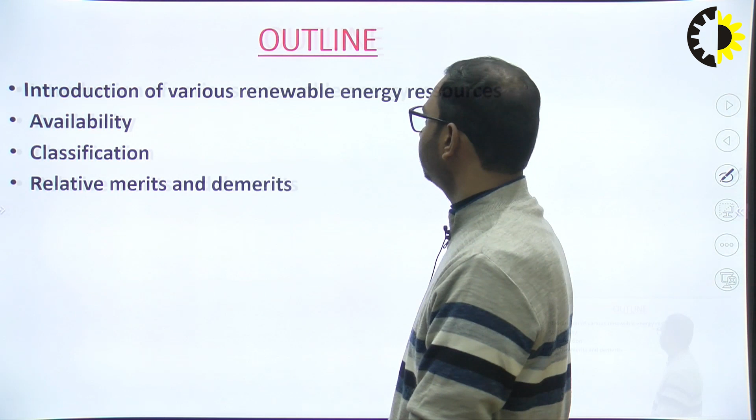So first of all, these are my outlines. In this lecture, I will discuss what is the introduction of various renewable energy resources, their availability, their classifications, and the relative merits and demerits of various renewable energy resources.

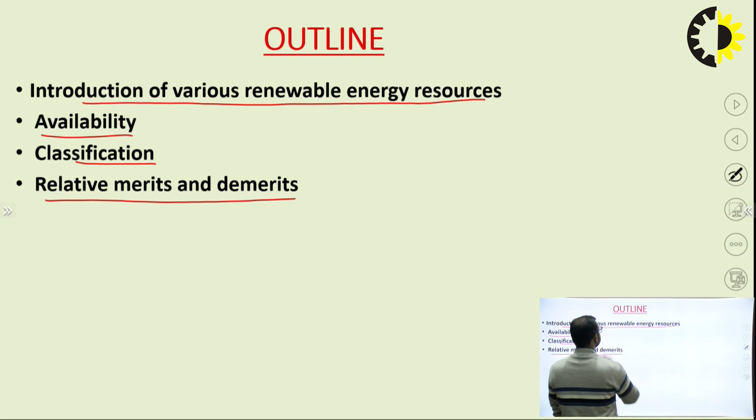Energy resources are categorized into two types: conventional energy resources, also known as non-renewable energy resources, and non-conventional energy resources, also known as renewable energy resources. So what is conventional and what is non-conventional energy resources?

First, conventional energy resources. These resources are accumulated in nature over a long span of time and cannot be quickly replenished when exhausted. Examples of conventional energy resources are coal, petroleum, natural gas, and nuclear fuels like uranium and thorium. These are all examples of non-renewable energy resources.

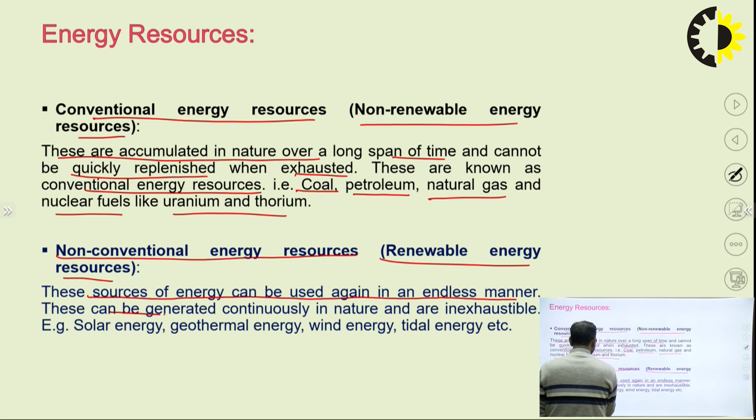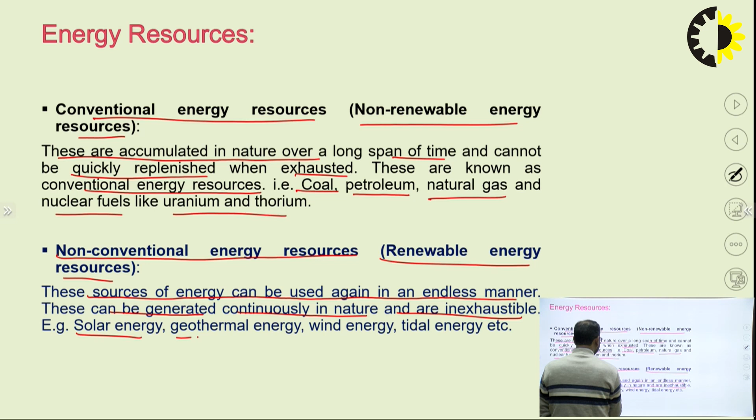Renewable energy resources can be used again and again, and can be generated continuously in nature, but are inexhaustible. Examples of non-conventional energy resources are solar energy, geothermal energy, wind energy, and tidal energy.

Examples of renewable energy resources include solar energy, biomass energy, wind energy, geothermal energy, and hydropower energy. Whereas fossil fuel, coal, natural gas, and nuclear fuel are examples of non-renewable energy resources.

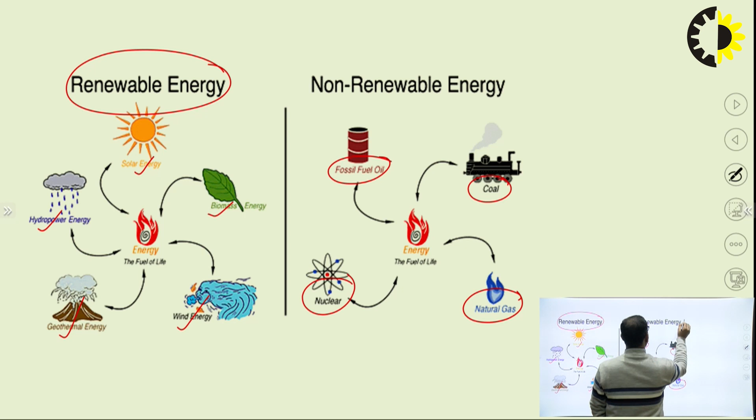Now, in the subsequent slide, I will discuss different types of renewable energy resources in detail.

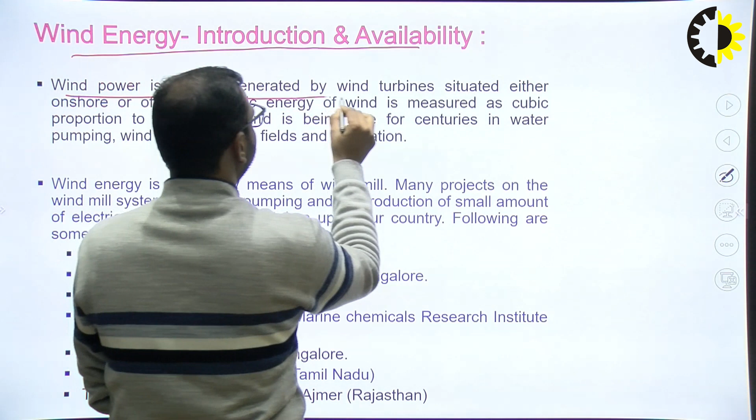The first one is wind energy. What is wind energy, its introduction and availability? Wind power is usually generated by wind turbines situated either onshore or offshore. The kinetic energy of wind is measured as cubic proportion to its velocity, and it has been used for centuries in water pumping, windmills, irrigating fields, and navigation.

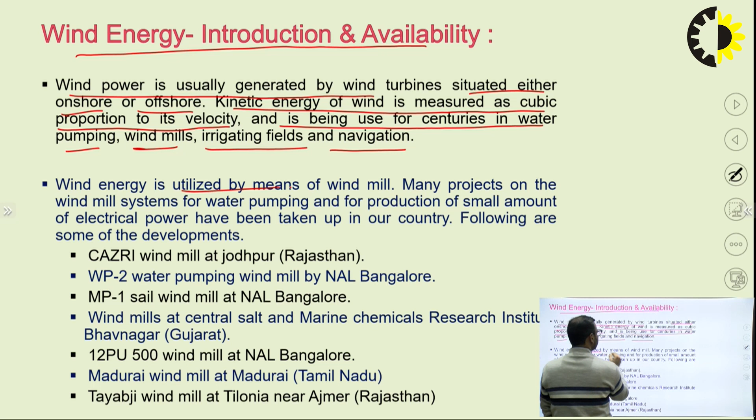Wind energy is utilized by means of windmills. Many projects on windmill systems for water pumping and production of small amounts of electrical power have been taken up in our country.

Following are some developments regarding wind power plants: CAZRI windmill at Jodhpur, WP2 water pumping windmill by NAL Bangalore, MP1 sail windmill at NAL Bangalore, windmills at Central Salt and Marine Chemical Research Institute, Bhavnagar, Gujarat, and the 12 PU 500 windmill at NAL Bangalore.

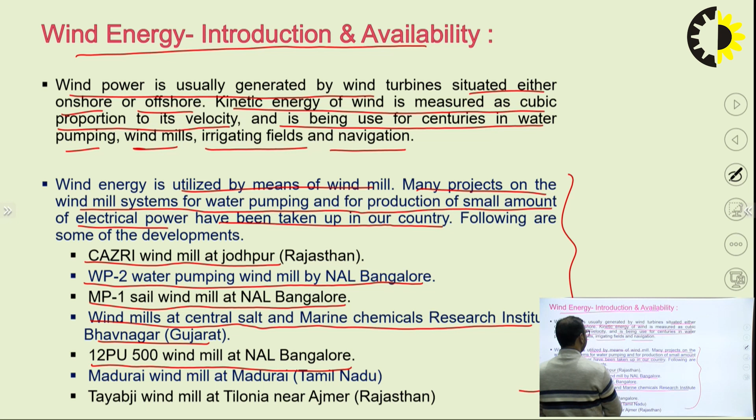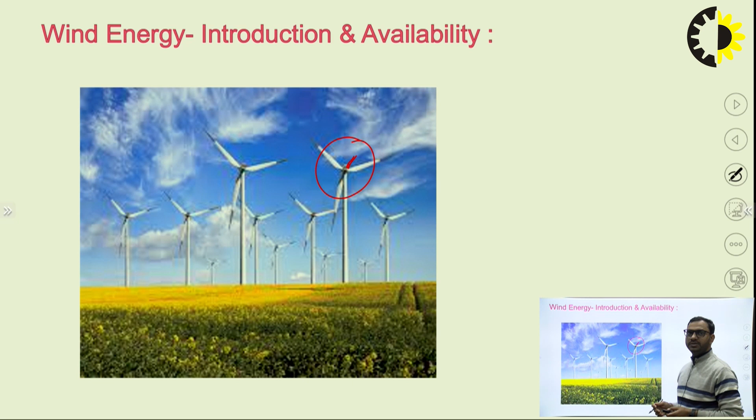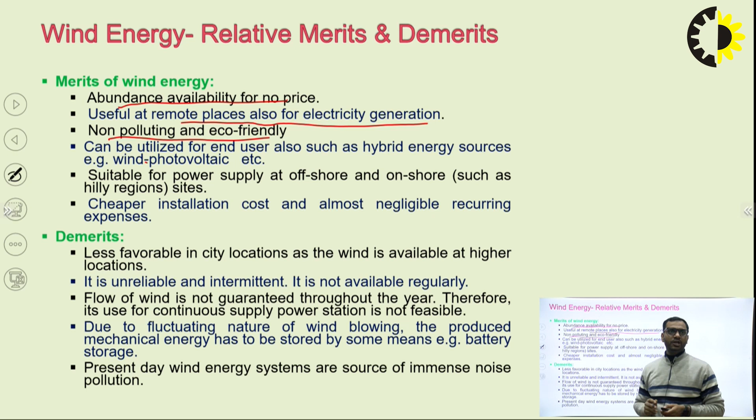Now, what are the merits and demerits of wind energy? First, abundant availability for no price. Second, useful at remote places for electricity generation. Third, it is non-polluting and eco-friendly. It can also be utilized for end users, such as hybrid energy sources, for example wind photovoltaic. It is suitable for power supply at offshore and onshore sites. It has cheaper installation cost and almost negligible recurring expenses. These are some merits of wind energy.

Now for its demerits: first, it is less favorable in city locations, as wind is available at higher locations. It is unreliable and intermittent, not available regularly. The flow of wind is not guaranteed through the year, so it is not feasible for continuous power supply stations.

Due to the fluctuating nature of wind blowing, the produced mechanical energy has to be stored by some means, for example in the form of a battery. The last demerit is that present-day wind energy systems are a source of immense noise pollution, meaning they produce lots of noise. So these are some merits and demerits of wind energy.

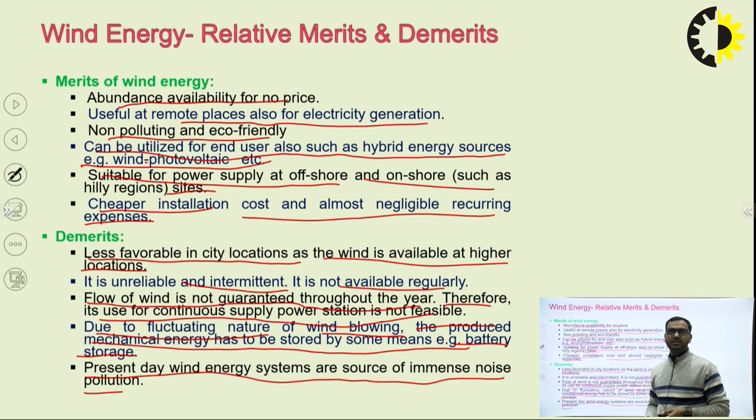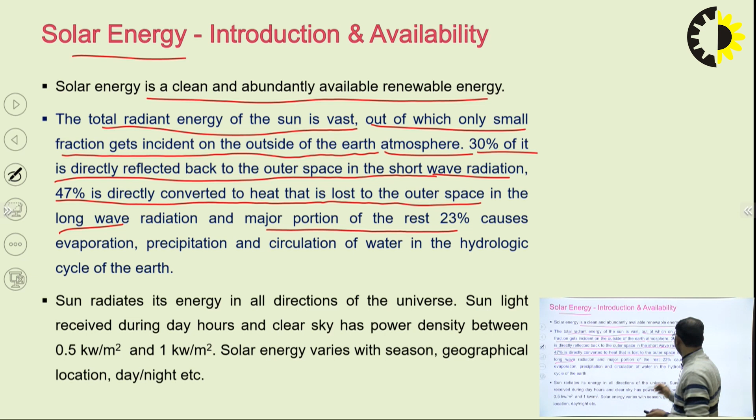So we can say that 47% is directly converted to heat that is lost to outer space in long wave radiation, and a major portion of the rest, 23%, causes evaporation, precipitation and circulation of water in the hydrologic cycle of the earth.

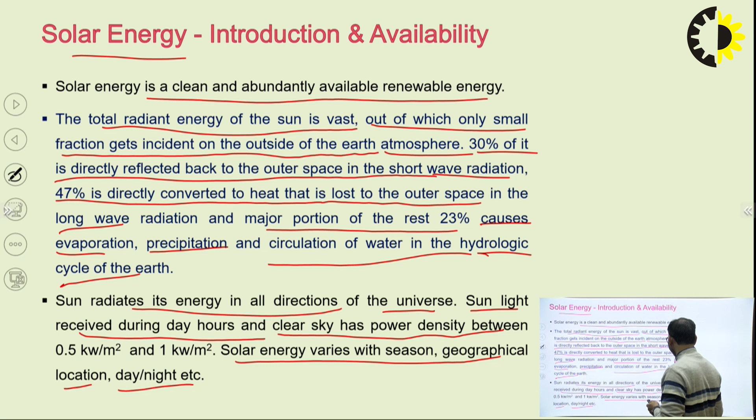Sun radiates its energy in all directions of the universe. Sunlight received during day hours with clear sky has a power density between 0.5 kilowatt per meter square and 1 kilowatt per meter square. So solar energy varies with season, geographical location, day and night, etc. Solar energy is dependent on these conditions.

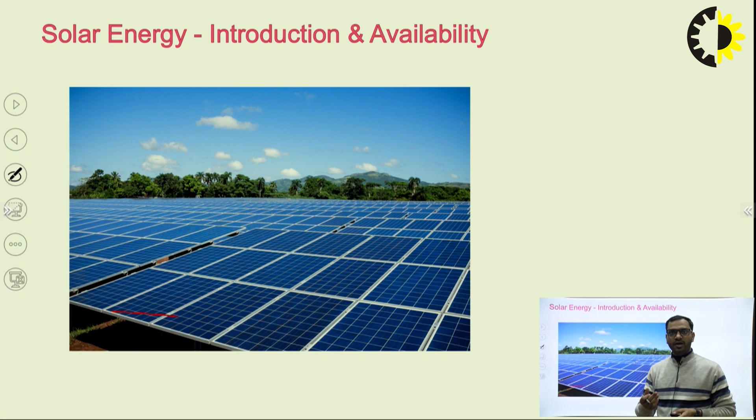Now these are some photovoltaic solar cells which work on the photovoltaic effect and produce electricity by using solar rays. So what are its merits and demerits?

Talking about its merits, first is noiseless operation. It occupies less space on the floor as there is no need of storage vessels. It has cheaper initial cost and no need of containers to store fuels. Another merit is most equipment does not require serious attention during working, for example food will be cooked simply by putting a solar cooker in sunlight.

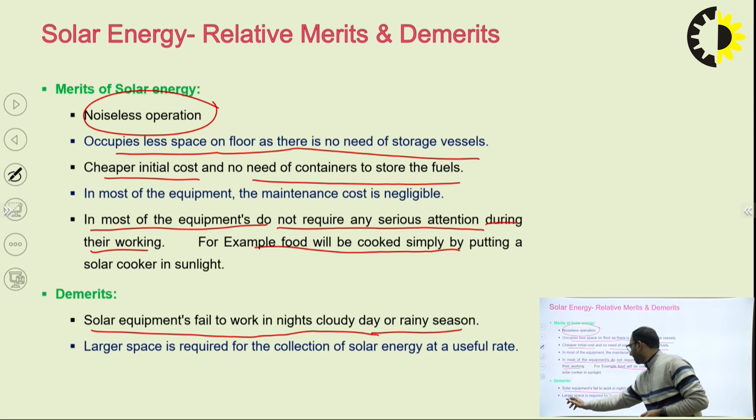These are some merits. Now talking about its demerits, solar equipment fails to work at night, on cloudy days, and in the rainy season, and larger space is required for collection of solar energy at a useful rate. So for large production of electricity through solar energy, the required space is larger.

Now talking about tidal energy, what is tidal energy? With the help of tidal energy we can produce tidal power, which exploits the movement of water caused by tidal currents, the rise and fall in sea levels due to the tides. Although not widely used, it has potential for future electricity generation and is more predictable than wind energy and solar power. The technology required to harness tidal energy is well established.

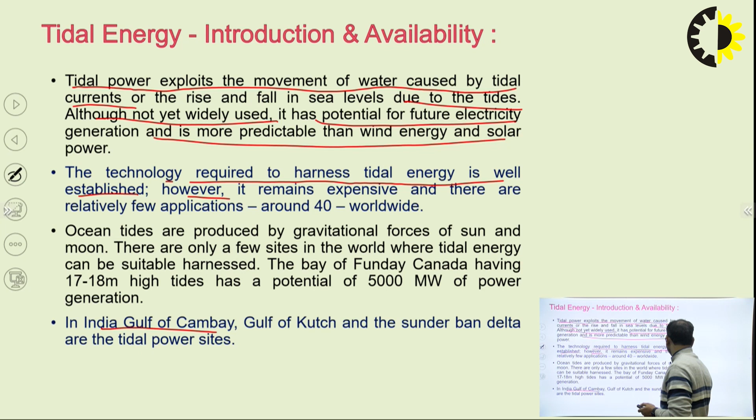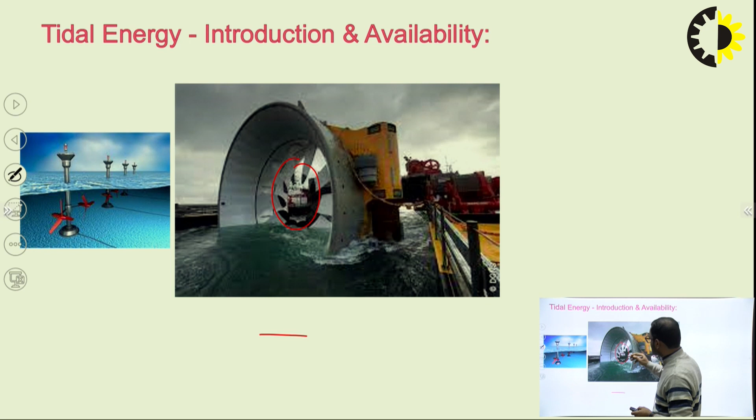However, it remains expensive and there are relatively few applications, around 40 worldwide. The Gulf of Cambay, Gulf of Kutch and the Sundarban Delta are the tidal power sites in India. These are the pictorial representations of a tidal power plant. Here, with the help of tidal energy, we rotate the turbine, which is coupled with an electric generator, which produces electricity. Now, what are the merits and demerits of tidal energy?

Talking about its merits, very less area is required because they are built on bays. It is free from pollution and does not use any fuel. It is much superior to a hydropower plant as that is totally dependent on rain, which always fluctuates year to year. Another merit is it does not produce any unhealthy waste like gases, ash, and refuse, etc.

Talking about its demerits, the first demerit is tidal power plants can be developed only if natural sites are available. As the sites are available on the bay, which will always be far away from the load centers, the power generated involves more transmission cost. The capital cost of the plant is also high. And the last one is navigation is obstructed. These are some merits and demerits of tidal energy.

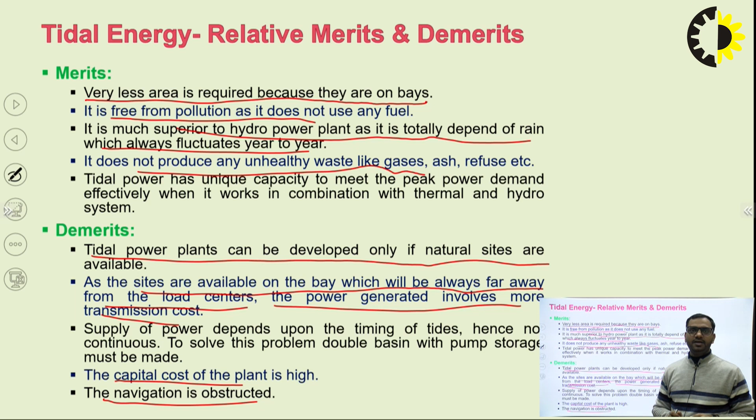Now I am talking about MHD energy. What is MHD? MHD means magneto hydrodynamic. The MHD generation, also known as magneto hydrodynamic power generation, is a direct energy conversion system which converts heat energy directly into electrical energy without any intermediate mechanical energy, as opposed to the case in all other power generating plants. So this is the pictorial representation of an MHD power plant.

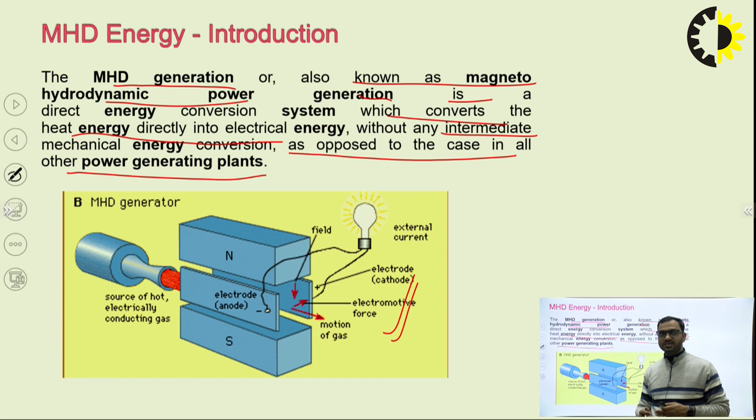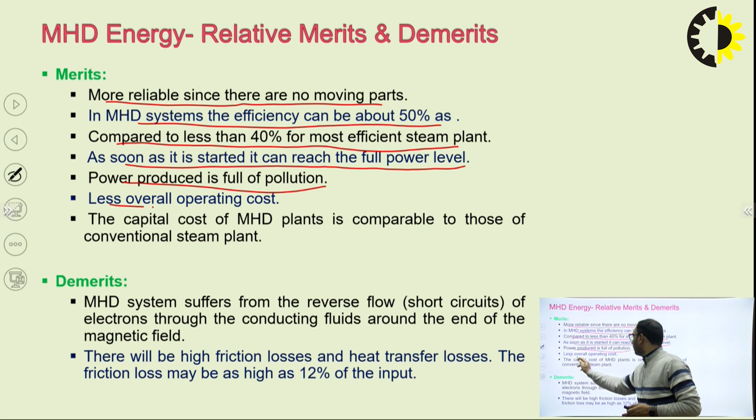Now we are talking about its demerits. The MHD system suffers from the reverse flow of electrons through the conducting fluids around the ends of the magnetic field.

So this is the disadvantage of MHD energy. There will be high friction losses and heat transfer losses. The friction loss may be as high as 12% of the input. So this type of plant has 50% efficiency.

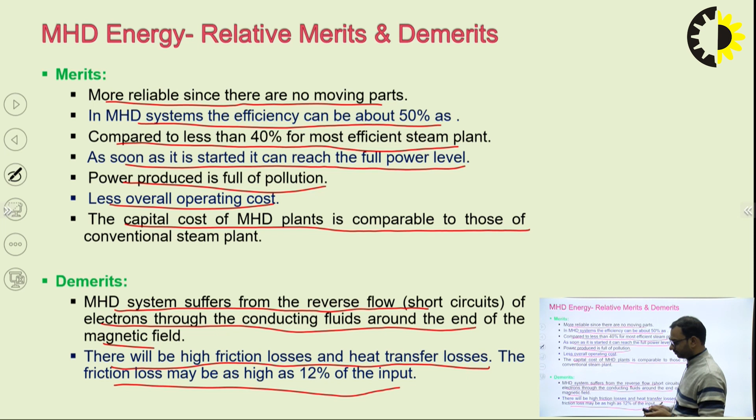Now what is fuel cell? Another renewable energy resource is fuel cell. So what is fuel cell? Basically, fuel cell is an electrochemical cell that converts the chemical energy of fuel into electricity.

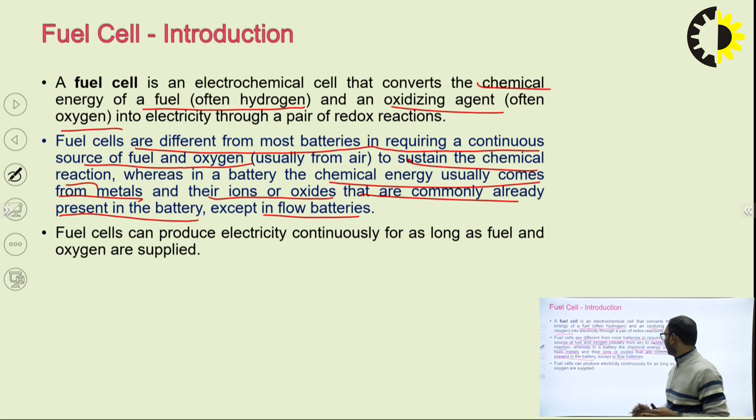And what is chemical energy? This chemical energy is hydrogen. And what is the oxidizing agent? The oxidizing agent is oxygen. Fuel cells are different from most batteries in requiring a continuous source of fuel and oxygen to sustain the chemical reaction, whereas in a battery, the chemical energy usually comes from metals and their ions or oxides, which are commonly already present in the battery, except in flow battery. So fuel cell can produce electricity continuously for as long as fuel and oxygen are supplied.

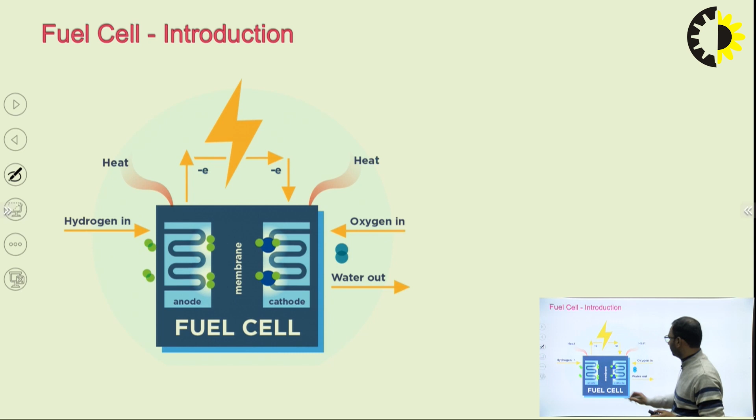So this is the schematic representation of a fuel cell. Here this is anode, this is cathode, and between anode and cathode this is electrolyte. Due to the chemical reaction occurring between anode and cathode, electricity is produced.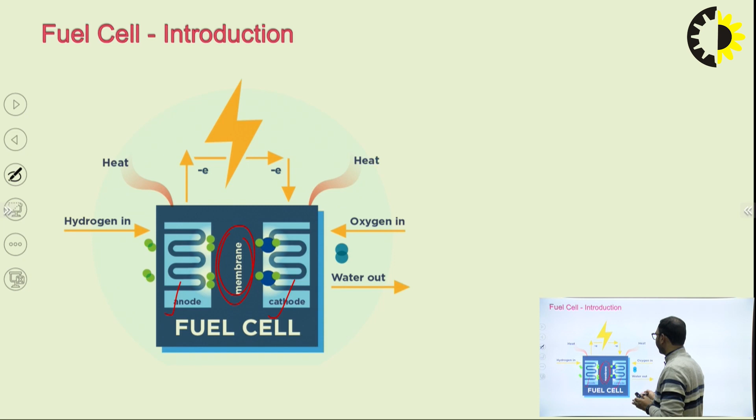So if you are talking about its merits and demerits, what is its merit? First, it has very high efficiency, as high as 70%, since it is a direct conversion process and does not involve a thermal process. Fuel cells have fewer mechanical components, hence maintenance is also less. Fuel cells take little time to start operation. Space required for a fuel cell power plant is less.

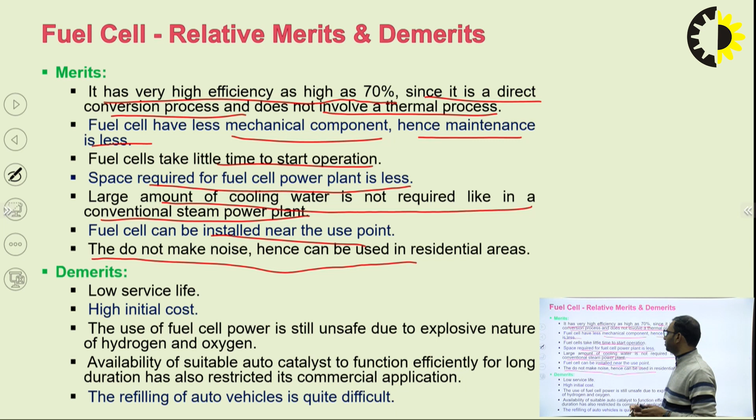Large amount of cooling water is not required like in a conventional steam power plant. Fuel cells can be installed near the use point, and they do not make noise, hence can be used in residential areas also.

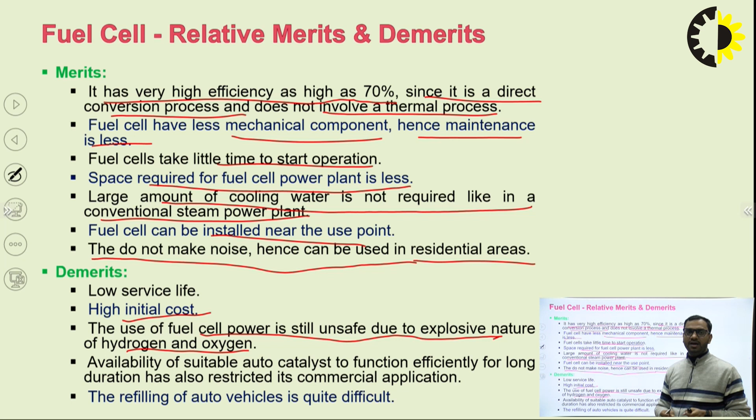Now, what are its demerits? The first demerit is its service life, which is low, and it has high initial cost. The use of fuel cell power is still unsafe due to the explosive nature of hydrogen and oxygen, so we can say that these are unsafe. Then, availability of suitable auto catalysts to function efficiently for long duration has also restricted its commercial application. And the last one is the refilling of auto vehicles is quite difficult.

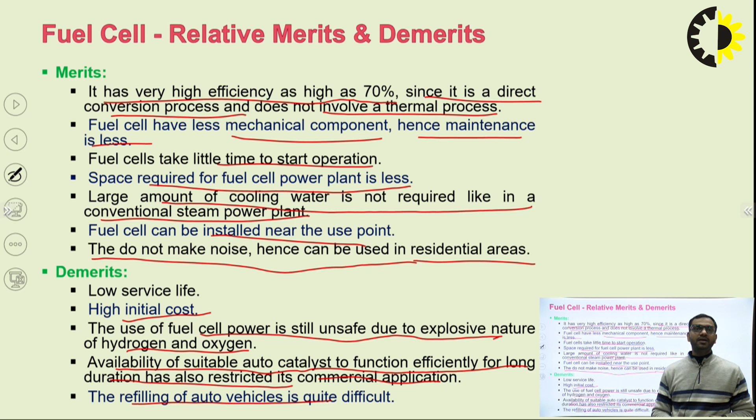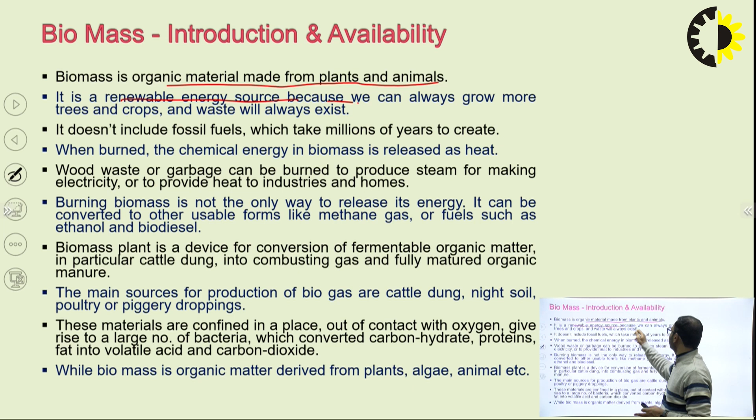Then another renewable energy resource is biomass. So what is biomass? Basically, biomass is organic material made from plants and animals. It is a renewable energy source because we can always grow more trees and crops, and waste will always exist. So it does not include fossil fuels which take millions of years to create.

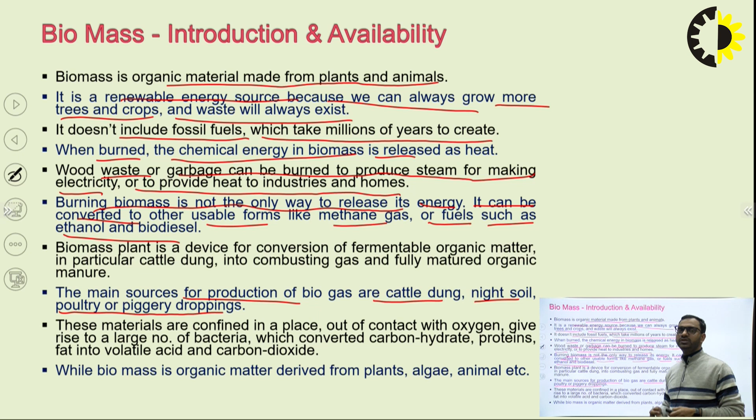When burned, the chemical energy in biomass is released as heat. Wood waste or garbage can be burned to produce steam for making electricity or to provide heat to industry and homes. Burning biomass is not the only way to release its energy. It can be converted to other useful forms like methane gas, or fuels, or ethanol and biodiesel. The main source of production of biogas are cattle dung, night soil, or poultry or piggery droppings. So by using this, we can produce heat, and by using heat, we can generate electricity.

If we are talking about its merits and demerits, it has very high cost of obtaining bioenergy through plantation, though this is lesser than the cost of obtaining energy from fossil fuels. Second merit is that plants ensure a continuous supply of energy due to their continuous growth. Combustion of biomass does not cause SO2, meaning sulfur dioxide air pollution, since the content of sulfur in vegetable matter is even less than 0.1%.

Growth of biomass consumes more carbon dioxide than is released during combustion, besides producing the atmosphere-purifying oxygen as a product of the photosynthesis process. The last merit is biomass is a low polluting type of energy. All its byproducts are capable of being recycled. So this type of biomass energy produces lesser pollution compared to others.

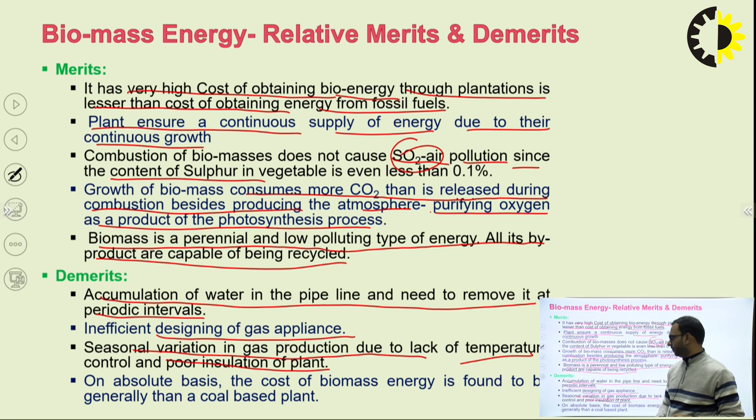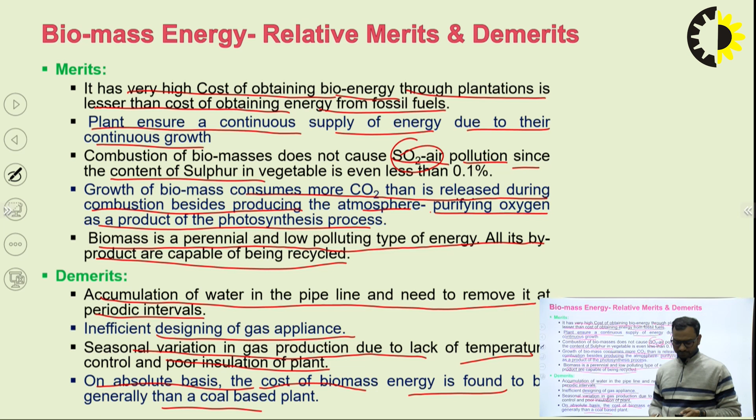Then if we are talking about its demerits: accumulation of water in the pipeline and need to remove it at periodic intervals, inefficient designing of gas appliances, seasonal variation in gas production due to lack of temperature control, and poor insulation of plant. Another demerit is that on an absolute basis, the cost of biomass energy is found to be generally higher than coal-based plant. So these are some merits and demerits of biomass energy.

Now, another renewable energy resource is OTEC energy. What is OTEC? OTEC means Ocean Thermal Energy Conversion system. Basically, ocean thermal energy conversion is a process or technology for producing energy by harnessing the temperature differences between ocean surfaces and deep ocean waters.

Due to the difference between the ocean surface temperature and deep ocean water temperature, we can produce electricity. Energy from the sun heats the surface water of the ocean. In tropical regions, surface water can be much warmer than deep water.

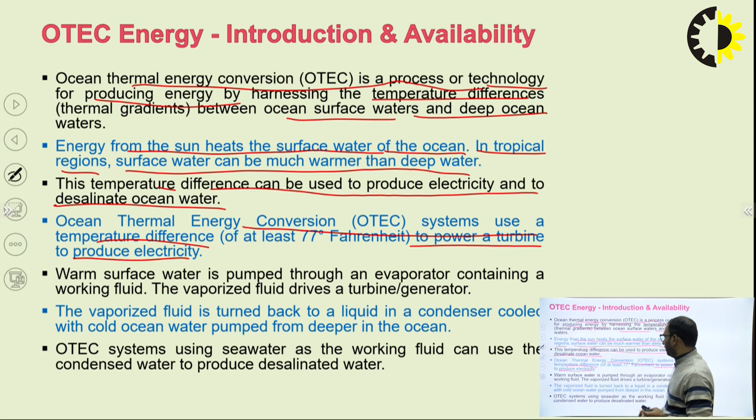This temperature difference can be used to produce electricity and to desalinate ocean water. Ocean thermal energy conversion (OTEC) system uses the temperature difference between the top and bottom surface to power a turbine and produce electricity. The vaporized fluid is then turned back to liquid in a condenser cooled with cold ocean water pumped from deeper in the ocean.

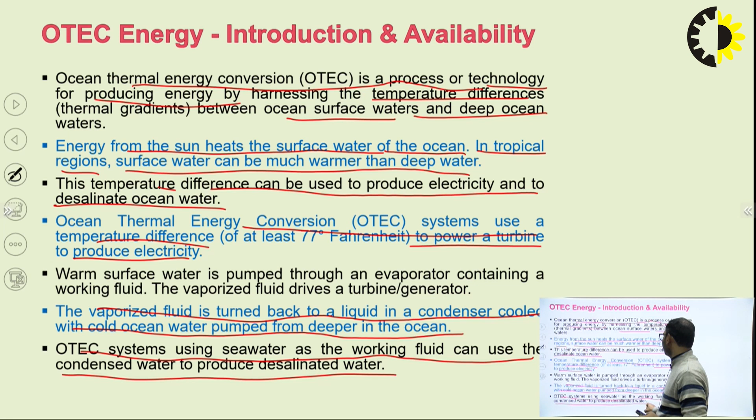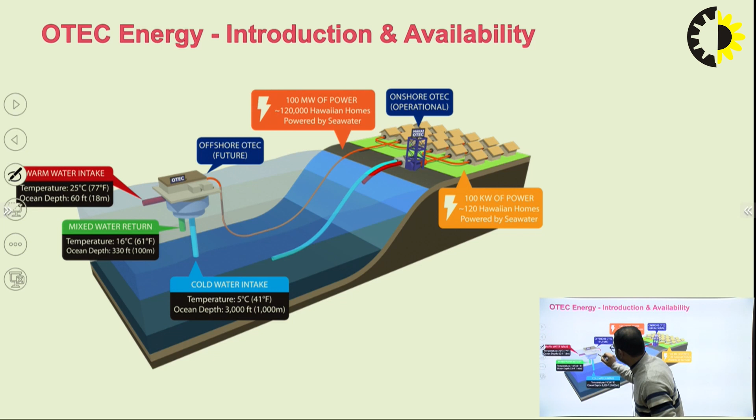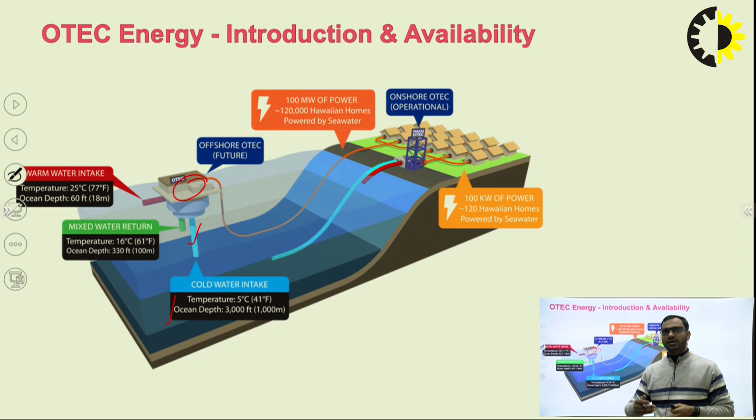An OTEC system using seawater as the working fluid can use the condensed water to produce desalinated water. This is the pictorial representation of an OTEC power plant. Here is the turbine, this is the bottom surface, this is the top surface. By using the temperature difference of the top and bottom surface, we can run the turbine, which is coupled with the electric generator to produce electricity.

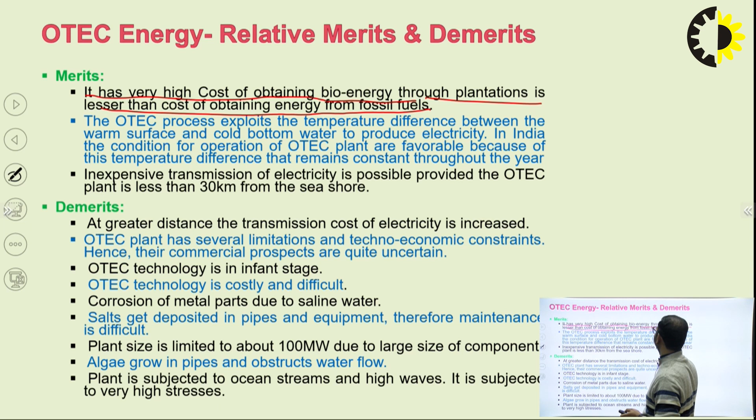Now what are the merits and demerits of the OTEC energy system? The OTEC process exploits the temperature difference between the warm surface and cold bottom water to produce electricity. In India, the conditions for operation of an OTEC plant are favorable because this temperature difference remains constant throughout the year. Inexpensive transmission of electricity is possible provided the OTEC plant is less than 30 km from the sea shore.

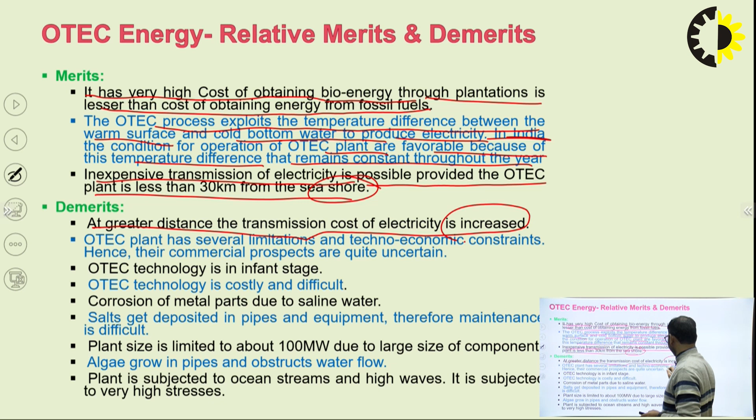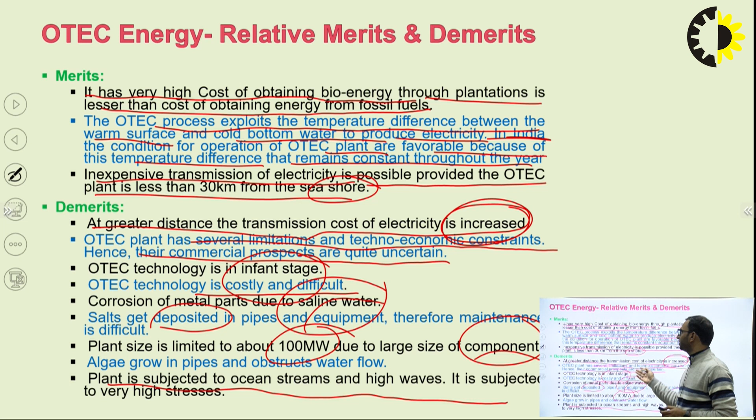Now what are its demerits? At greater distances, the transmission cost of electricity increases. It also has several limitations and techno-economic constraints, hence its commercial prospects are quite uncertain. OTEC technology is costly, difficult, and still in its infant stage. Corrosion of metal parts due to saline water is more, and salts get deposited in pipes and equipment, making maintenance difficult. Plant size is limited to about 100 megawatts due to the large size of components. Finally, the plant is subjected to ocean currents and high waves, so it experiences very high stresses. These are some merits and demerits of the OTEC energy system.

Next, another renewable energy source is geothermal energy. Geothermal energy is derived from high temperature geothermal fluids. This can be utilized for power generation and thermal applications like greenhouse cultivation, hot water irrigation in cold countries, cooking, process heat, and electrical power generation.

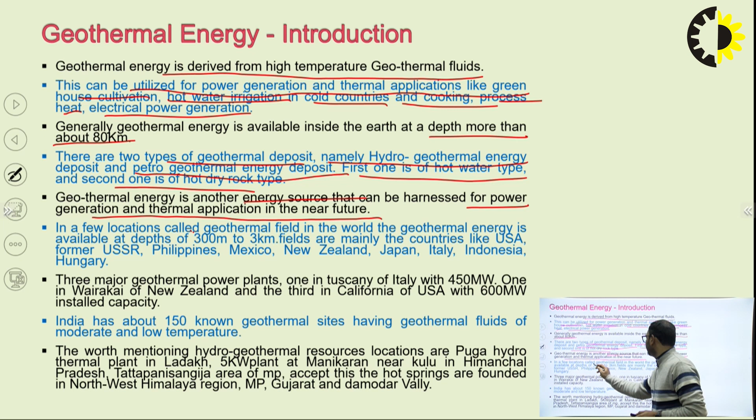In a few locations called geothermal fields in the world, geothermal energy is available at depths of 300 meters to 3 km. These fields are mainly in countries like USA, Philippines, Mexico, New Zealand, Japan, Italy, Indonesia, and Hungary. These are some locations where geothermal energy is available.

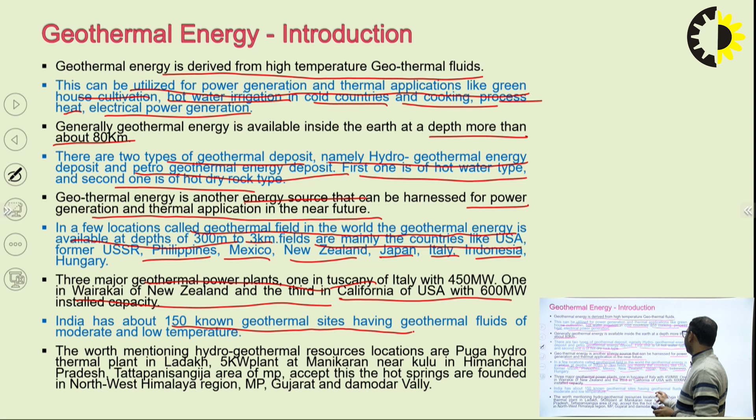There are three major geothermal power plants: one is Tuscany in Italy with 450 megawatts, one is Wairakei in New Zealand, and the third is California in USA with 600 megawatts installed capacity, available in the world. India has about 150 known geothermal sites having geothermal fluids of moderate and low temperature.

Now talking about its merits and demerits: geothermal energy offers an inexhaustible and versatile source of energy. It is naturally available, hence less expensive. It causes negligible pollution. Guarantee of power generation is more than wind and solar energy. It can be used for many other purposes such as heating and cooling.

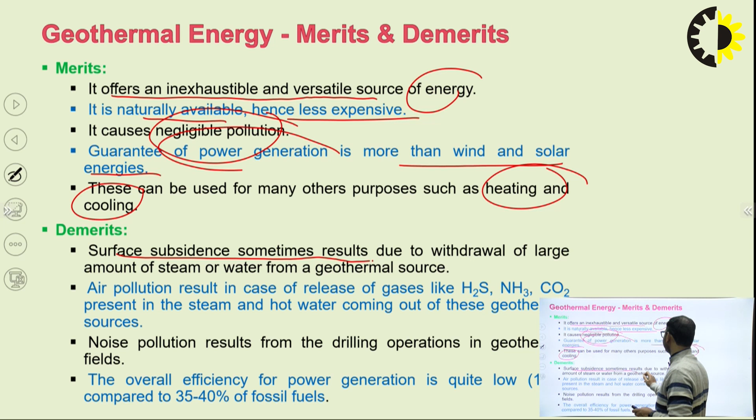Now what are its demerits? The first demerit is surface subsidence, which sometimes results due to withdrawal of large amounts of steam or water from a geothermal source. Air pollution results from the release of gases like H2S, ammonia, and carbon dioxide present in the steam and hot water coming out of these geothermal sources. Noise pollution results from drilling operations in geothermal fields. The overall efficiency for power generation is quite low, around 15%, compared to 35 to 40% for fossil fuels.

So these are the merits and demerits of geothermal energy.